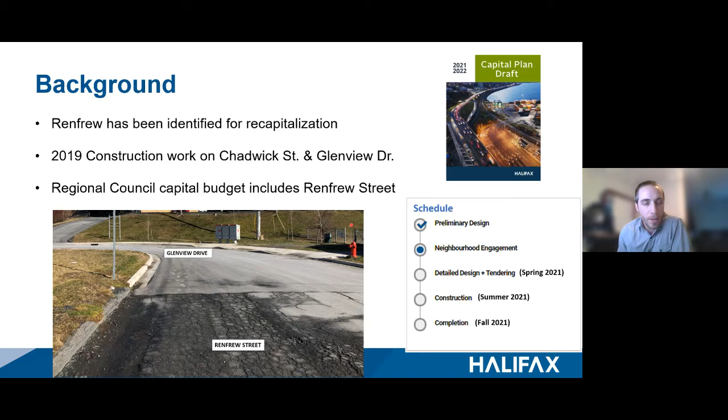And after this, we'll be working through detailed design, tendering this spring, and construction this summer, and hopefully ending this fall. So it's a bit of context for where we are and where we're going with this.

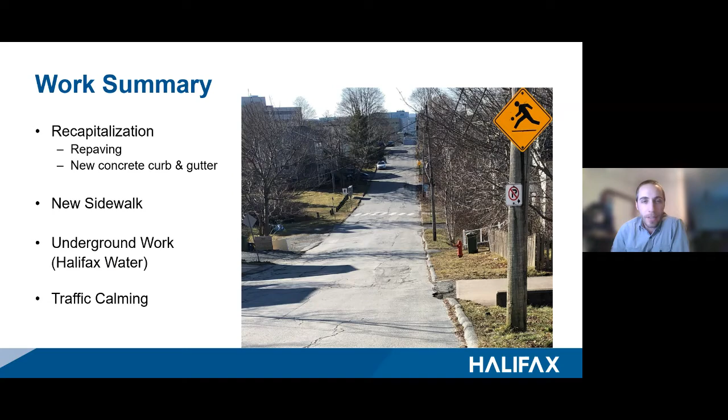So in general, the work includes, as I mentioned, repaving the street, replacing the old asphalt curb with new concrete curb and gutter, installing a new sidewalk, as well as taking this opportunity to repair or renew some of the old underground infrastructure that Halifax Water will be doing, as well as some traffic calming on the street. I'll get into some more details on these items a bit later.

And in general, the benefits and the reason we're doing the project is to improve safety and accessibility with the new sidewalk, as well. We're looking to add some lighting on the street for the sidewalk, for the pedestrians and for residents and the vehicles as well. And the newly paved street will enhance the aesthetics and improve the drivability.

As I said before, we can renew the underground infrastructure before we pave. It's always a good time to do that, so that we don't have to go back afterwards and dig up any pipes that need replacement on a newly paved street. And also, we're looking at some drainage improvements, which is helped by the new curb and gutter, addition of catch basins, and that kind of thing, as well as traffic calming with some speed tables to help slow down vehicles, improve safety for all users, people who are walking, cycling, or driving.

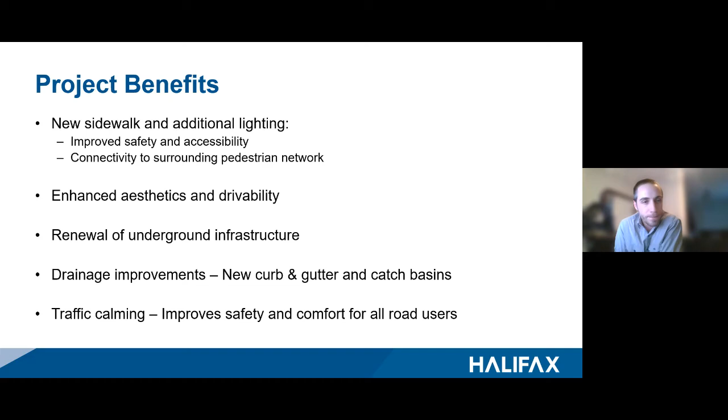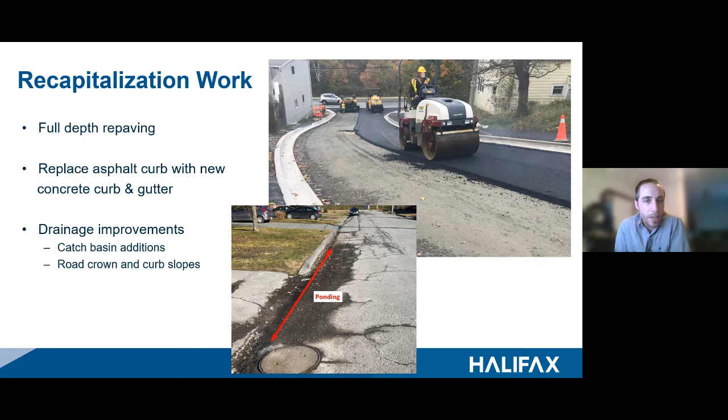So the recapitalization work includes full depth repaving of the entire street between Pleasant and Glenview, as well as, as I mentioned, replacing all the old asphalt curb with new concrete curb and gutter. You can see in this picture some work that was done on Chadwick last year, and as well we're looking at some areas where you can see here there's some ponding on the street. We want to add some catch basins, change some of the slopes slightly to avoid this ponding that we get, and let water flow where it needs to go, so we can fix some of those issues.

And maybe I'll let Siobhan just talk a little bit about the sidewalk prioritization that we do here. Perfect. Thank you, Phil. So when we talk about building sidewalks in the municipality, we do it for safety and connectivity purposes, but we also do it for providing different transportation options for people to use to get around in their neighborhood. We want to make it comfortable and safe for people to drive, but also to walk, cycle, and get around their neighborhood in a range of different ways.

So what guides those decisions are two planning documents that we have: the Integrated Mobility Plan, which is our overarching transportation planning document approved in 2017, which ties it all together, but more specifically the Active Transportation Priorities Plan, which gives us clear direction about where to build the sidewalks and how to prioritize them. There is a tool within the Active Transportation Priorities Plan that helps us to look at the pedestrian potential of each road segment that is being requested either through 311 or the councillor, or we'll look at these opportunities to integrate with road resurfacing like on Renfrew.

It looks at putting in sidewalk where there's proximity to schools, to daycares, community centers, seniors' homes, other major employment areas or higher density population areas where people might be living. It also looks at where we can close gaps in the sidewalk network. So we want to build sidewalk to connect existing pieces and help people get around their neighborhood a little bit more safely. So when we looked at Renfrew Street, not only have we had a few requests for sidewalk on Renfrew, but when it came up for recapitalization, we saw that it does rate highly using this prioritization tool.

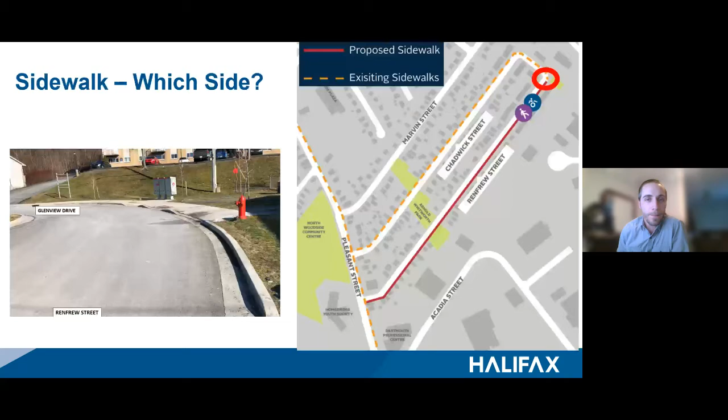And some details about the proposed sidewalk. It's going to be 2.1 meters, or about 7 feet wide, adjacent to the curb. So there'll be no sod buffer in between the sidewalk and the curb. And as I mentioned, on the side closest to the hospital. And in order to do this, we have some challenges.

So this means, as I mentioned, narrowing the street from approximately 9 meters to 7 meters. You can see here in the pictures what Chadwick looked like before and after. A nearly identical treatment was put in. And the cross section shows, more or less, how the existing curb is going to get taken out. It'll match the back of the new sidewalk, and then the street gets narrowed and repaved.

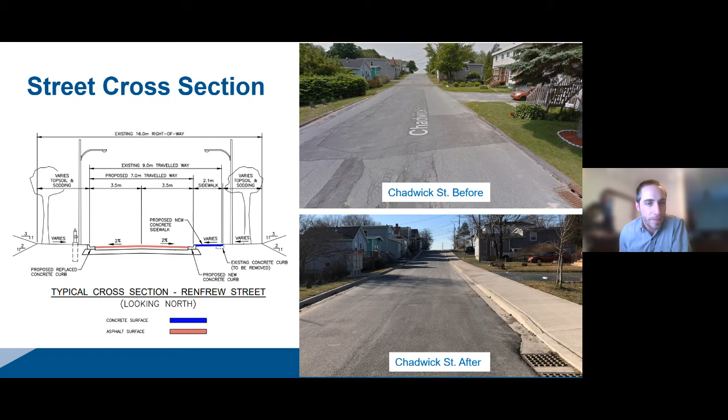So one of the major considerations for doing this work and narrowing the street is what will the parking impacts be. So the plan is to remove parking on one side of the street, which would be the side of the street closest to Chadwick or downtown Dartmouth, and to keep parking on the east side of the street where the sidewalk's going, closest to the hospital.

And the reason for keeping parking next to the sidewalk is it allows for better connectivity for pedestrians. It means if somebody parks, they get out of the car and the sidewalk's right there, so it reduces the need to cross the street so many times. And also, the majority of the existing parking is on that side of the street anyway, so we'd be able to keep approximately 60% of the parking of what's there today.

So this change would keep two-way traffic, same as on Chadwick Street, and it would act as a yield style street, which is fairly common. So it means if there's lots of cars parked on the side and two cars meet each other, they might have to yield to the car coming, and then find space to go through.

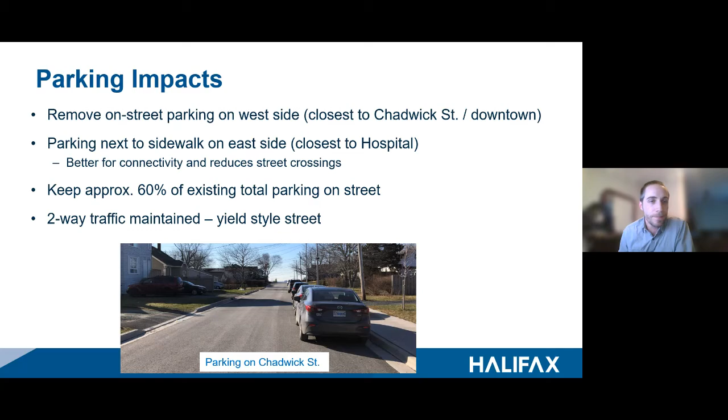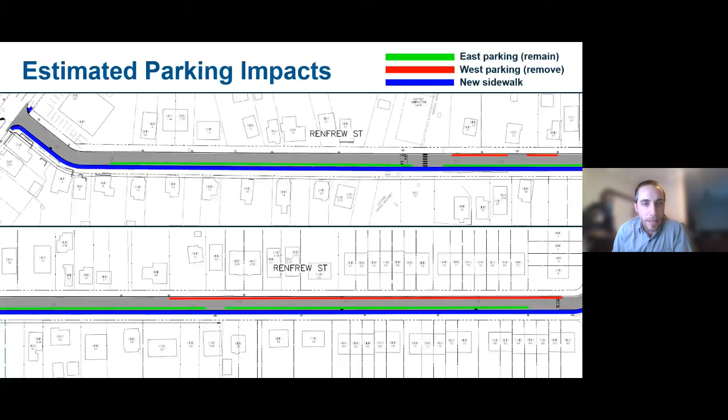The red shows the existing parking that we're proposing to remove, and the green is the parking that we're proposing to remain. So you can see there's more existing parking on that side of the street, which helps maintain as much parking as we can next to that sidewalk.

HRM, we completed a lighting analysis of the street to look at the current lighting levels, and identified a few dark areas that could benefit from some new lights. So we're also planning to add approximately 4 new lights to the existing utility poles along the street.

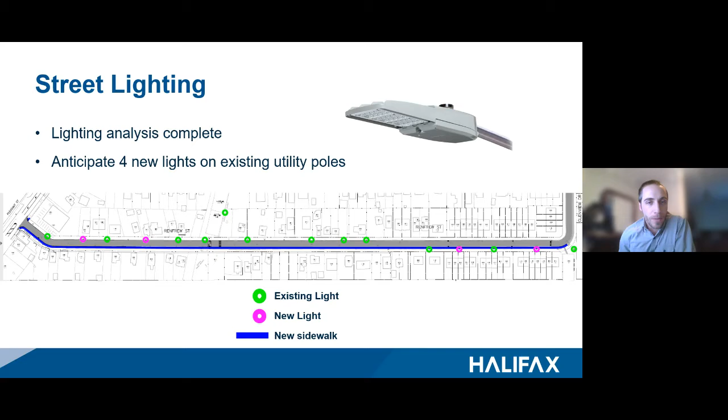In general, this is more important for projects like this where you're adding new sidewalks, to make sure that the lighting levels are good for all users.

And as well, we've collected and reviewed some traffic data on Chadwick and Renfrew, and the recommendation is to implement some traffic calming measures. And after reviewing all the different options here, speed tables, which are very similar to speed humps, were the recommended treatment. Speed tables are essentially the same as speed humps, except they're elongated, so they have a flatter top, and they're longer. But they have the same effect to slow down traffic.

And you can see we're actually planning to put it in on both streets so that people won't be tempted to take one street over the other. If we only put it on Renfrew, people may circle around to Chadwick so that they can speed on that street. So this should have a neighborhood traffic calming effect. And the initial locations we're looking at are down by the crosswalks, kind of close to the park.

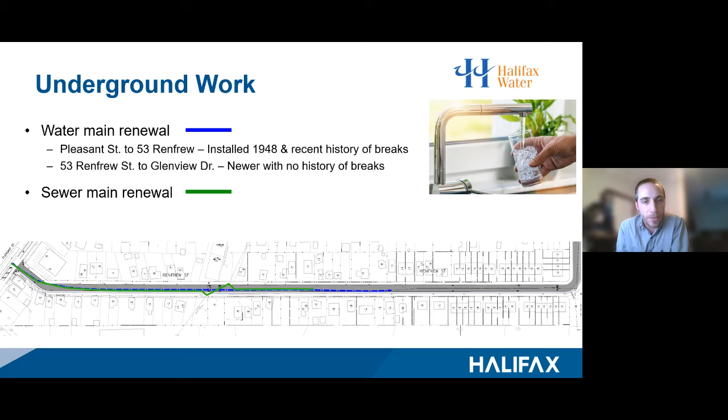We'll be looking, as we work through detailed design, at the grades. How do the driveways and any curbs blend into the existing grades seamlessly? Trying to minimize property impacts or minimize any work. Keep the work as close to the curb as possible, but also make the slopes and the drainage and everything work.

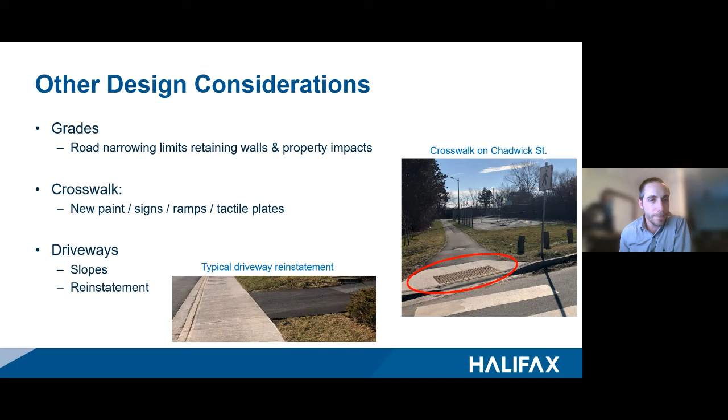And for construction impacts, once we get to construction, we don't know the duration yet. We're still working through the details of the design and the tender documents. But just to give you an idea, on Chadwick and Glenview, it was an 18-week total construction period. However, Renfrew is slightly shorter and has a bit less water and sewer work. We can't give any definitive dates, but that's what was experienced on those streets in 2019.

And you can expect some hand-delivered construction notices coming closer to construction, at least 1 week or more prior to construction. This will give details such as when the work starts, what the duration will be, and who you can contact for any questions or issues that come up.

And in general, a lot of questions we get is about people accessing their driveways. In general, we ask the contractors to maintain driveway access as much as possible through construction, so that residents' lives are not impacted and things are kept as easy as possible. However, there may be some short durations when a new curb or sidewalk is placed where you're not able to drive over it because it's still fresh concrete.

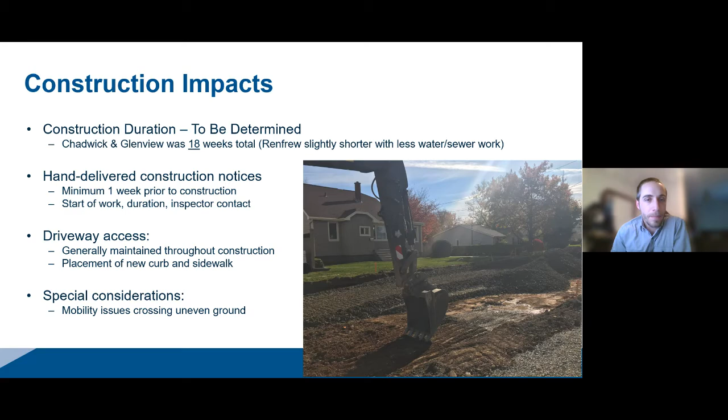So that all gets coordinated through construction, and there'll be some notices or coordination with the contractor and the construction inspector to sort through any of those issues and talk about the timing for that. And then, of course, if there's any special health considerations or mobility issues, we'd like to hear about it beforehand so that we can try and accommodate that and make it work for you.

So just to give you an idea, if you haven't seen it already, you can go to the Shape Your City website, which gives a good background review of a lot of what I talked about already here, but might go into some more detail in some areas. So you can go there, and there's also a survey at that link that's open until April 9th for the next few days.

And of course, we'll have some chance for questions after this, but if you have any ongoing questions or concerns, feel free to reach out to me. My contact information is here. It's also in the letters that were distributed to the residences. So hopefully I can help address any questions or concerns. And then, as I said, this spring we're working through design and tendering to find a contractor to complete the work. And as I noted, you'll see another notice before any work begins.

And I think at this point, Siobhan, now would be a good time, I guess, to type any questions you have. And yes. There may be a slight delay from typing questions to when we can see them, but we'll try to answer them as best we can. Yes. Due to the software we're using, there's probably about a 10 or 15-second lag, but we'll give people some time to type in their questions. If you have anything that you'd like the project team to answer, write it in the Q&A text box, and we'll read it and answer it as best we can. So far, we've received one question, and we'll see if any more come in.

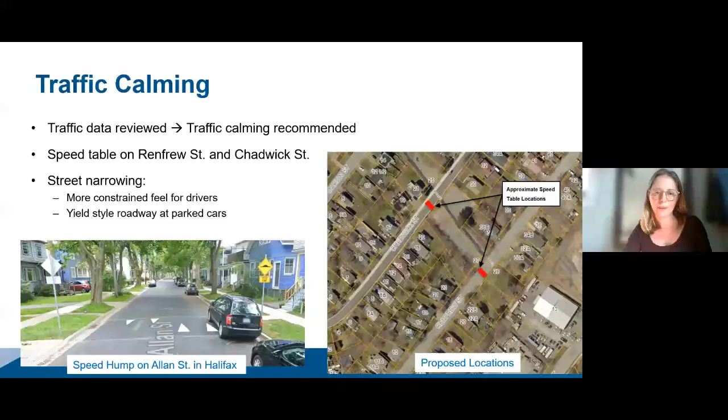But the first one, a participant says their name and address, which I'll conceal. And then their concern is about losing driveway area. It looks like the new sidewalk will be outside of the existing curbing, is their question. If that is the case, this will be a great improvement. So are you able to speak to that a little bit, Phil? Yeah, so I'll go back to this slide that illustrates that better. Just bear with me here.

So in the end, the idea is not to take away space from your driveway. So with the road narrowing and the sidewalk actually being on the edge of the existing road, as shown in blue on these images, the driveway space should more or less stay the same as it is now once construction is finished. I hope that answers the question.

I don't know, Siobhan, if you have anything to add to that. Yeah, just kind of picturing where the curb is now, and rather than moving it into your space, we're moving it away from your space. So you'll keep everything that you have, your lawns and your driveways, and you'll gain the sidewalk on the other side, is how I like to picture it. But that image does a great job there, Phil, of showing in blue how the sidewalk will be along the side of the street, and you'll lose roadway space for the purpose of improving pedestrian safety, which I think is great. In this situation, it's probably wider than it needs to be.

Yep, and normally we would look at putting the sidewalk behind the existing curb, but just with the constraints we have here, it's not feasible. You know, people wouldn't have enough space to park. The sidewalk would be right against some buildings. And I think that the better solution here is to narrow the street.

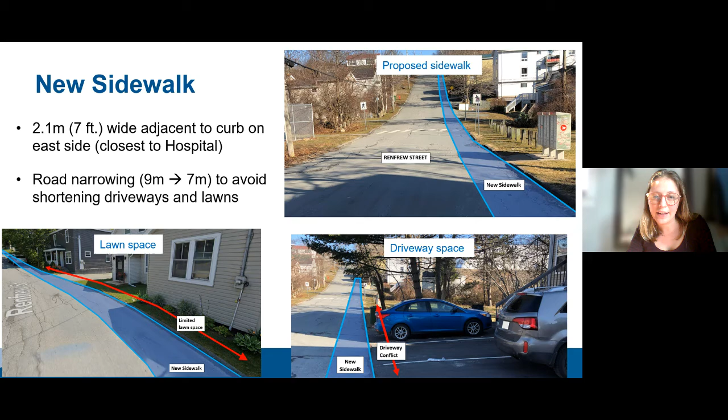Yeah, it seems like a really great project for the neighborhood in terms of improving the road safety for all. There's a little bit of trade-offs with the road narrowing and some of the parking, but overall it looks pretty good. I think we've been hearing a little bit of feedback through email, Phil, would you say?

Yeah, I've had some feedback, calls and emails, and a lot of people have the same questions or concerns. Which side is the sidewalk going in? How does it change the street and the parking? That kind of thing. And hopefully the website should explain it quite well. Hopefully, what we've gone over here will help with some of those questions. Yeah.

All right, so we got one here. Let's see. This one says, do Chadwick residents have any feedback post-construction? That's a good question. Did the Chadwick residents have any feedback post-construction about how it was operating or what their experience was like after the fact?